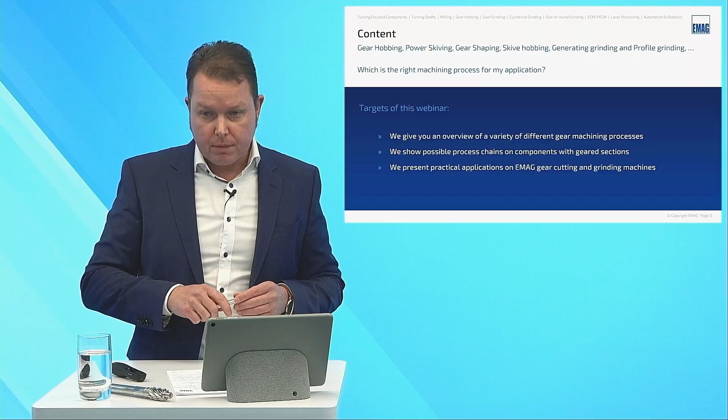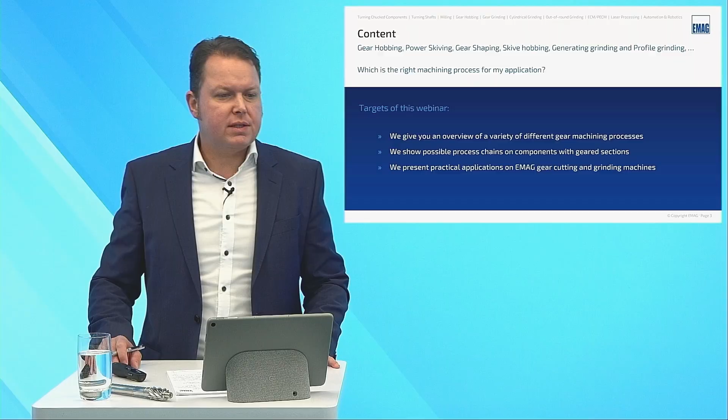The targets of our webinar are the following: we are going to give you an overview of a variety of different gear machining processes, then we are going to show you possible process chains on components with gears, and we present practical applications on EMAG machines that we have already realized in the past for our customers.

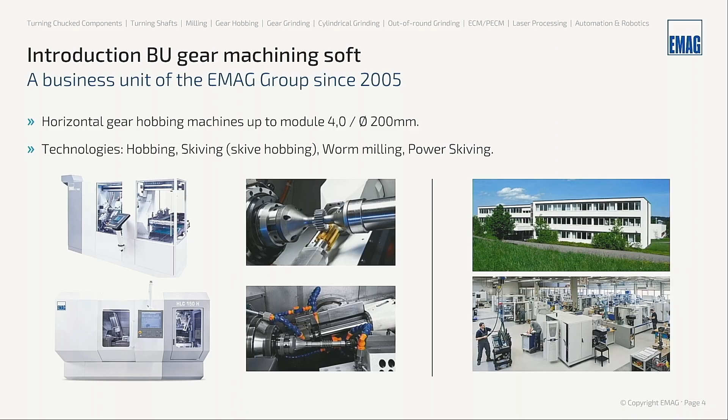The business unit I come from is placed in Villingen-Schwenningen, Black Forest area. Here the focus is on horizontal gear hobbing machines up to module 4, diameter 200 millimeters. The technologies are hobbing, skiving, that means skive hobbing, worm milling, and also power skiving processes.

And Alex, I kindly invite you to introduce your business unit as well. Our business unit EMAG SU is located in Anzola, in Italy, close to Bologna. Our products are vertical and horizontal hobbing machines, vertical and horizontal profile cutting machines, shaping machines, shaving machines for the automotive industry, horizontal profile grinding machines with different applications, and vertical generating and profile grinding machines. The maximum diameter we can produce is up to 500 millimeters.

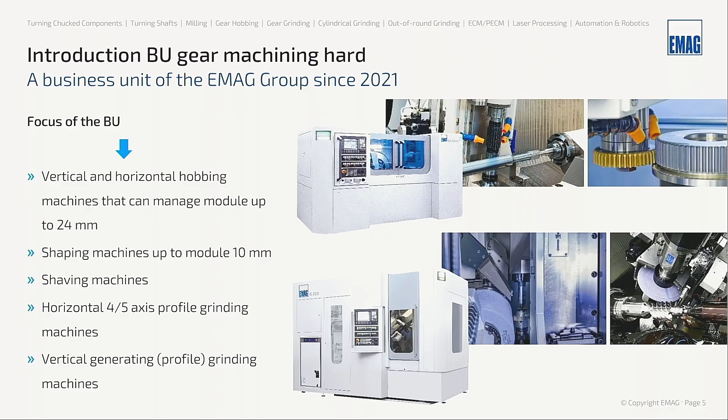Let's come to the classification of the manufacturing processes of gear production. There is a specific breakdown according to the DIN standard, the DIN 8589-6, that classifies these processes, and here is the overview.

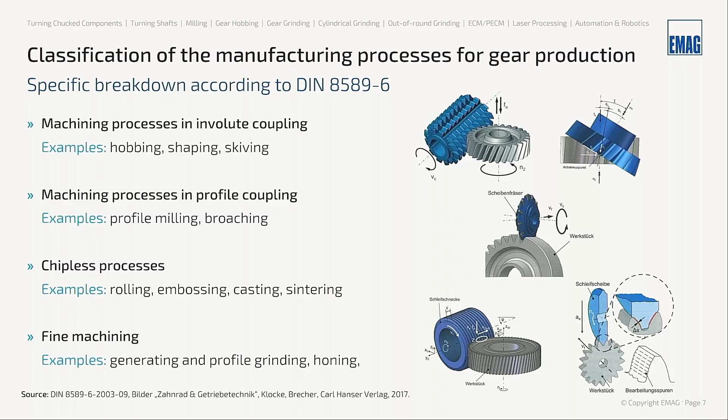We have machining processes in so-called involute coupling, which we'll talk about a little bit later in more detail - that means, for example, hobbing, shaping, and skiving. Then we have the machining processes in profile coupling, this is profile milling or single index milling, for instance, or broaching. Then we have chipless processes such as rolling, casting, or sintering. And last but not least, there are also the fine machining processes such as generating grinding, profile grinding, or gear honing.

So what is the meaning of a generating process? I'm trying to explain this to you in more detail. On the left side of this slide, we have an overview of the different processes: shaping, hobbing, and power skiving are shown. On the left side, you can also see this, let's call it a basic rack, and the basic principle of this generating method is explained on the right side of the slide.

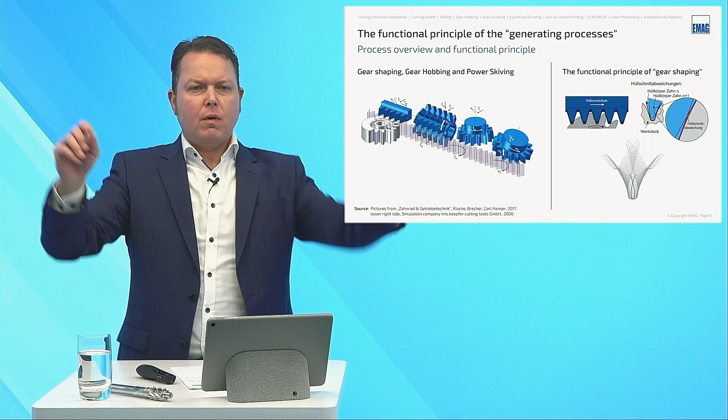Let's take a look at this basic rack. Let's assume we would conduct a cut into the plane of this slide. So we have a gear, shown in gray color, and this blue colored basic rack, and now we conduct a cut. What will happen? We will, of course, have the negative shape of this basic rack in our gear.

If we now were to rotate the gear slightly and simultaneously shift our basic rack, and then execute another cut, we would of course leave the pattern once again. By means of this generating, this coupling of the two, we make sure that these patterns overlap in a certain manner. This is how it works to realize an involute tooth shape by means of a straight basic rack profile.

Of course, this leads systematically to certain deviations. This is the so-called enveloping cut deviations, one of the systematic deviations that are known from the gear hobbing process, for instance. Here on the lower side of the slide, you can still see a realistic simulation.

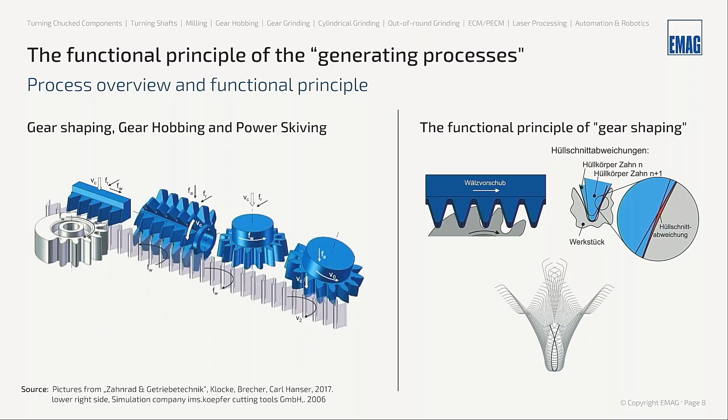Simulation of a steering pinion. It's a tooth gap from a steering pinion, and you can see how this tooth follows a trochoidal path into the tooth gap and out again. This will still be overlapped by the axial feed rate, which is actually a linear movement into the plane of the slide.

Which process is the right one to choose? First and foremost, there is, of course, the feasibility. Here on the left side of the slide, we can see a nice picture from Ruben Bauer, who has written his dissertation at the IWU Fraunhofer in Chemnitz. He has made a very nice example. You can see in gray color this workpiece. It is a kind of spline, and it has an adjacent shoulder.

Here we see the three different potential gear machining processes: gear hobbing, gear shaping, and power skiving. There is one significant difference. In gear hobbing, we have a hob and a gear, and they interact with a crossed axes angle of roughly 90 degrees. As you can see here, we would have interference with the adjacent shoulder if we were to hob this workpiece. So this will not work, but there is an alternative process available.

This is gear shaping or also power skiving. With gear shaping, we have the shortest over-travel of the tool. We just need some tenths of a millimeter in order to make the tool exit, to get out of the gear we are machining. This is enough, so we can machine this part with the adjacent shoulder, due to the fact that the axis of tool and workpiece are actually aligned to each other.

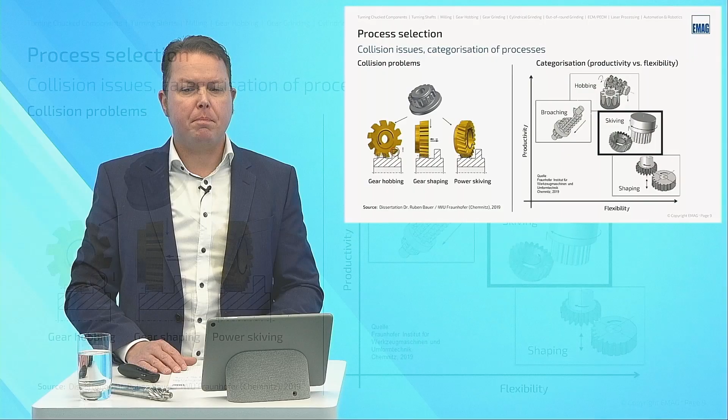They are parallel. Then there is power skiving. This is somewhat in between with regards to the over-travel of the tool, because here the workpiece symmetry axis is inclined at an angle of approximately 20 degrees. This is necessary in order to make the process work, and this is actually where the cutting speed comes from. This is the basic kinematics of power skiving, and here also a certain over-travel is required, but way less compared to the gear hobbing process.

On the right side, we still have from the dissertation of Dr. Ruben Bauer a categorization chart. We have productivity and flexibility on the two axes of this diagram. On the left side we see the broaching process. Broaching is considered not very flexible, simply because every broaching needle is dedicated to each individual internal gear that is going to be broached. So there is not much flexibility, but it is considerably productive since only one stroke is required to finalize the internal spline.

Then we have hobbing. This is very productive and flexible at the same time. I 100% agree with that, because hobbing gives us the flexibility to use one basic rack - one hob profile - to hob any number of teeth, as long as there is no profile modification required in the hob. That makes this process extremely flexible or versatile, and also productive, since it is a continuous machining process.

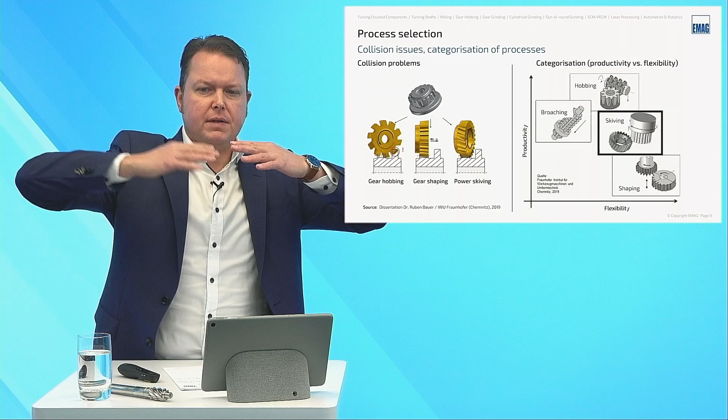And last but not least, there is also the shaping process in this chart. It's considered to be flexible but less productive. Why? Simply because of its kinematics - the shaping process is of a non-continuous character, meaning we have linear strokes that conduct the cutting movement. Due to the reason that it is simply not continuous, it is less productive.

Which are the accuracy classes on the gears that one can achieve with those processes, and which is the surface finish as far as the roughness values RZ are concerned?

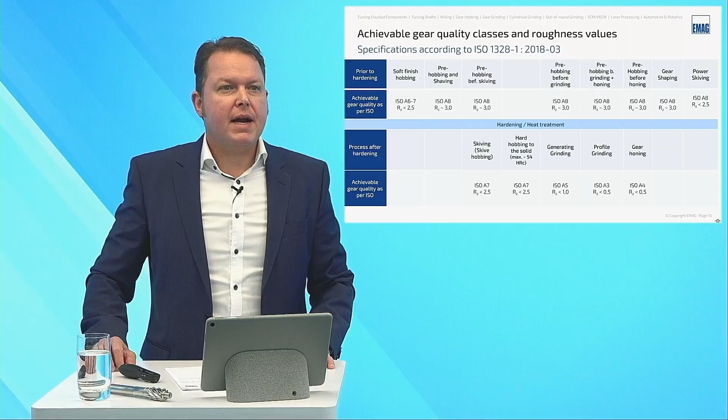Here we have prepared a nice overview for you. It shows you the different processes in the first line. Underneath, in the second line, we can see the corresponding accuracy classes according to the ISO standard 1328-1. Then in the middle of the slide we have the hardening process, and then we come down to the hard finishing processes. Let's make one example here.

The second column from the left is soft finish hobbing. We can achieve an accuracy class, well, with a good tool, maybe 3A or even 4A accuracy. With a good blank and a good machine, of course, and work holding fixture, we can achieve maybe class 6 to 7, and a surface finish on the flank of RZ 2.5, corresponding to an RA value of approximately 0.5 micrometer. Then comes heat treatment.

And Alex, what would you say, what is achievable when it comes to the hard fine machining processes? With generating grinding, you come down to class 5, and with profile grinding, it's a little bit better, up to class 3.

This, of course, has always to do, as you mentioned before, with the tools which we are using, and also with how good the incoming quality is, the quality of the clamping fixture. So this has also an influence on the achievable quality you get out at the end. The better these clamping fixtures and the incoming quality are, the better the final quality is at the end. And also with the surfaces, it depends which kind of tools you are using, which kind of roughness you can achieve at the end.

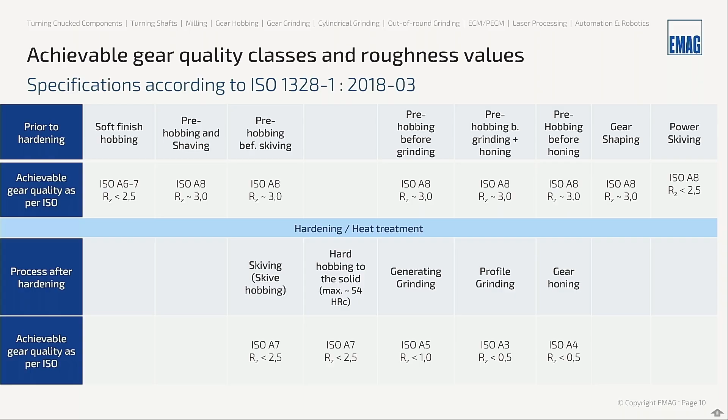Alex, one question. Besides the conventional method of generating grinding, I think there is also polish grinding. Would you consider polish grinding to be the new industrial standard for the OEM and Tier 1 business? What would you say? No, I don't think this is the standard.

The reason is when you are using polish grinding, you must do a rough and a finishing pass, then jump to a different area of the grinding wheel and do the polishing pass, and this takes more time. So the costs are also higher. I think in some applications it makes sense to do this, but in other applications it makes no sense. So there is maybe some balance between these two kinds of processes.

Maybe an alternative to this is fine grinding, where we do a roughing and a finishing pass on two different grain sizes of the grinding wheel itself. So I think this is something in between. Right, okay, understood, thank you.

So let's come back to the topic of the process chains. This chart shows that there are many different viable ways to machine a gear. On the left side, we see the blank. This can be a forged part, it can be a slug, it can be maybe turned from the bar, whatsoever. And the question is, how can we come to the final status of the gear?

I would say when it comes to the determination of the process chain, the properties of the final product determine how the process chain should look like. Here are some viable ways. Let's start from the right side of the chart.

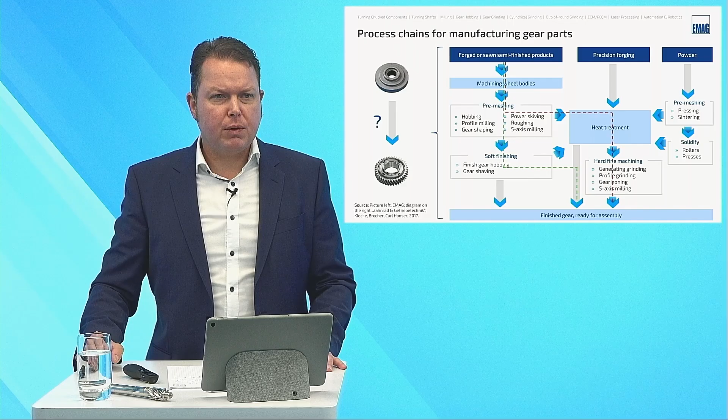We see powder metallurgical processes, for example sintering. This process is a very good solution when it comes to extremely complex geometries on gears. In case you have a gear with blind holes, slots, or cams, if it's really a complex geometry, then powder metallurgical processes can really make sense. There is, of course, the disadvantage that still today powder metallurgical gears usually are not yet on the same level as conventionally produced gears as far as their mechanical properties, such as tensile strength, are concerned.

An alternative to this is the precision forging process. I always think about the straight bevel gears, for example, in a differential gearbox from a passenger car. These gears, for example, are usually precision forged so that there is actually no chip-removing process as far as tooth machining is concerned.

And then comes, of course, here in red and green color, the two typical paths that we know from gear machining. So first of all, we start, for example, from a slug. Then we have machining of the wheel body. We talk about rotating workpieces usually, so turning is usually the preferred method.

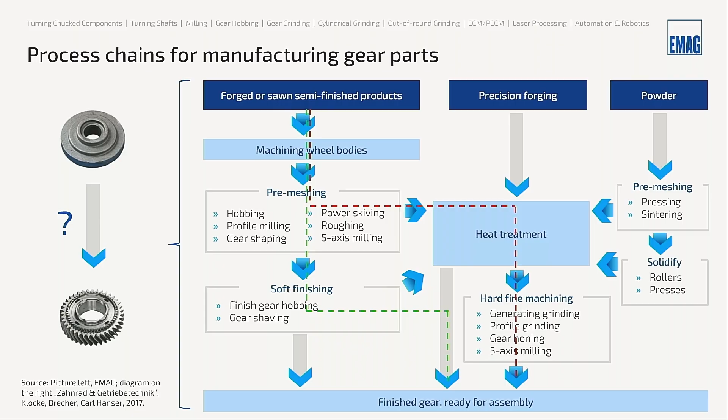This could be made, for example, on an EMAG VL3 Duo, Op10, Op20 turning. Then comes green machining of the gear, which could be hobbing. Now we follow along the green path - it could be finish gear hobbing. Again, if we use an appropriate hob in good accuracy, good blank, good work holding fixture, good machine, and apply a two-cut strategy, we may achieve a DIN quality class 7, and the workpiece will either still be hardened or be ready immediately for assembly. The red path foresees heat treatment in between, and afterwards hard fine machining, such as generating, grinding, and then we end up with a way higher accuracy in gear geometry and surface roughness.

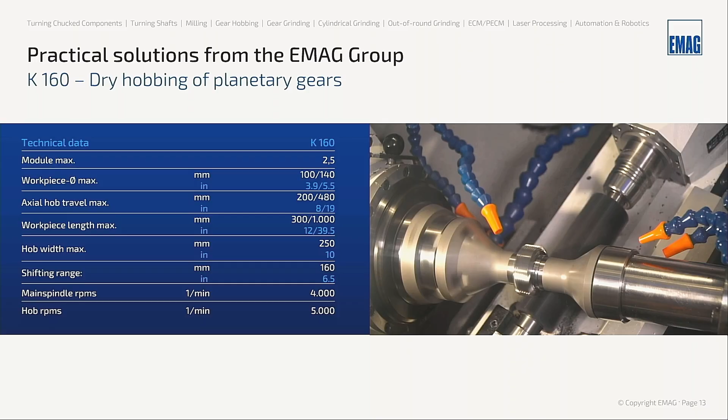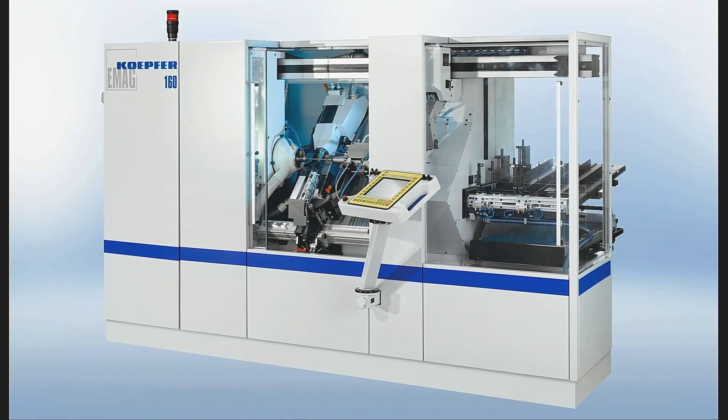How can such a process look like when it comes to pre-hobbing, rough hobbing, before gear grinding? Here we see an application on a Koepfer 160 gear hobbing machine, horizontal style. On the right side we have the automation cell, and on the left side there's the work area.

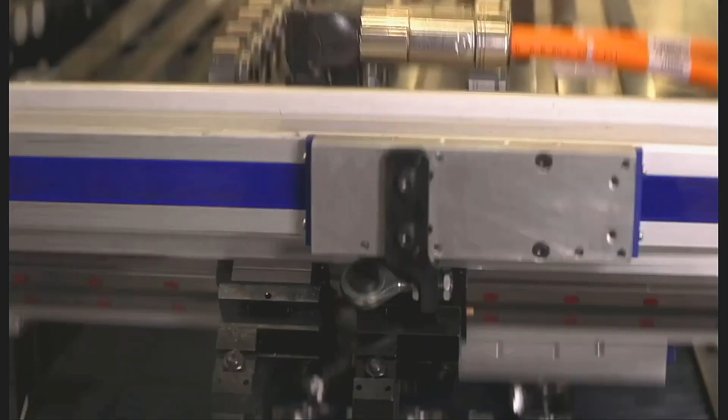Here now the movie shows the so-called servo distributor. This consists of two additional auxiliary axes and CNC-controlled axes that take care of the workpiece handling. These blanks roll down by gravity on such a chute magazine, and once the workpieces have been finished, they will be deposited underneath on the conveyor belt.

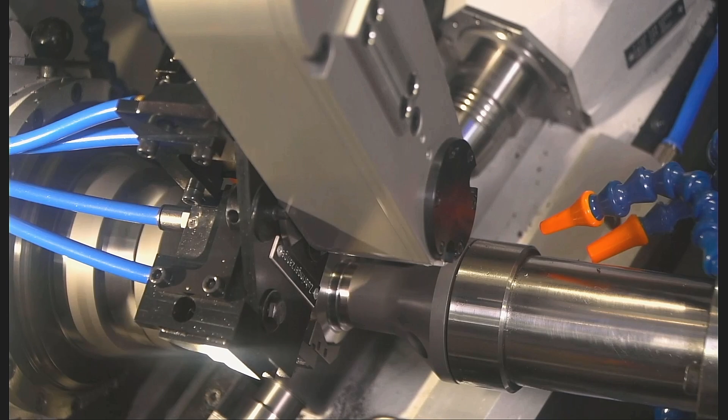Now we see the process. This is a tungsten carbide hob, shank type execution, diameter 50 millimeter, 17 gashes, 2 starts, dry hobbing, Alcrona coated, single cut strategy. On the left side you see the deburring disc coming from the lower side in order to remove the burr on the face side of the gear. And here again, the finished workpieces deposited.

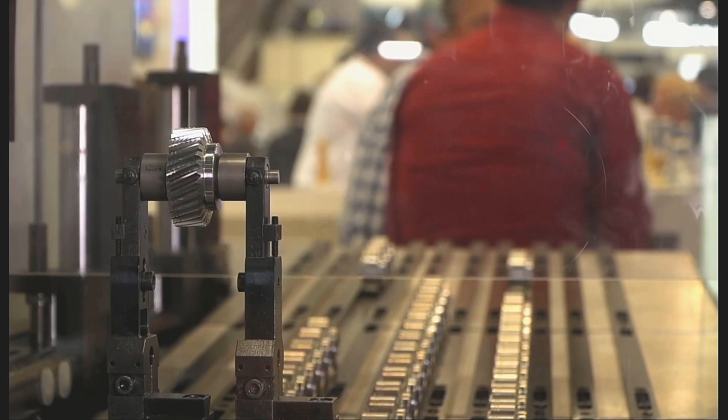This is now pre-hobbing before grinding. Gear accuracy class 9 is sufficient in this case, and the cycle time here is less than 10 seconds. So it's quite quick.

Then there are, of course, also larger, bigger machines within the EMAG Group and also from other business areas such as industrial or agriculture business. I think, Alex, you have a lot to tell about these applications, right? So we have bigger horizontal machines. All these machines have direct-driven table and direct-driven hob head, available in different axial travel - 1.5 meter, 2 meter, or 3 meter - for the CLC 260 H. On this machine you can cut long shafts, worm gears, normal gears, of course. So these are also good machines for job shop companies who have a big variation in their parts. But also in the truck industry or in the defense industry, there are a lot of long shafts where the two gears at the end must be aligned to each other.

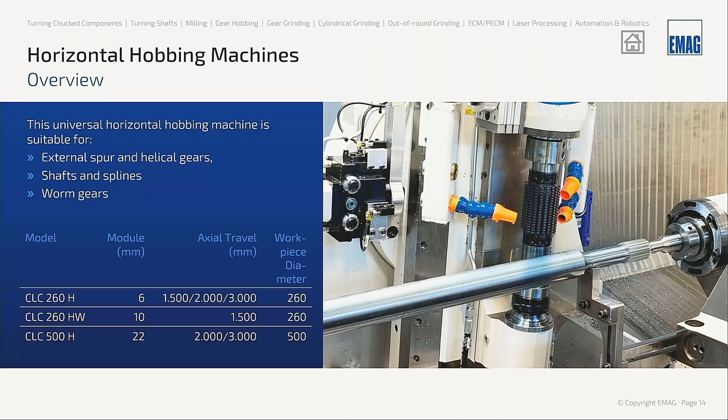This is the perfect machine for this because you can cut on both sides in one clamping, and have a retractable inductive sensor which can be swiveled out to find the right position relative to each gear. Why does it work on these machines? In the right picture, you can see an automatic steady rest. This is a 3-point steady rest, which can be moved automatically on the OD of the part and can be positioned in the machine wherever a gear is located.

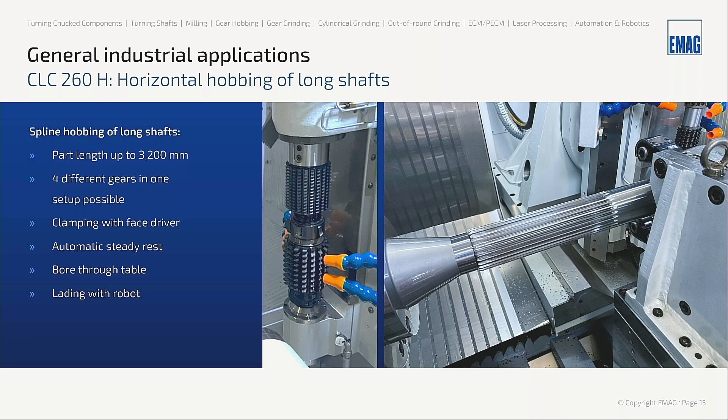So here the setup time is very small. This part will be clamped between a face driver and the center on the tailstock side. Then with the steady rest in the right position, you can cut all the gears along this part. There is a possibility to have 4 different gears on a shaft, which can be produced in one setup. Also on the left picture, you can see the assembly of a tool arbor.

Here we have 3 different hobs on the machine. This is a module 4 and module 2 hob, and in between there is a chamfer cut unit where we can produce a chamfer on the module 4 part only from one side. It depends here on the part we use.

So here the maximum length between centers is 3.2 meters on this machine, but there is also a table through-bore with 80 millimeter where you can put longer parts through this table bore and then cut the part on one side, move it out, turn it around, and put it again. Also, these machines are available with a milling cutter head for cutting worms, for example. Loading normally is here with a robot, and we also have a nice chain storage where different lengths and sizes of workpieces can be stored during the process.

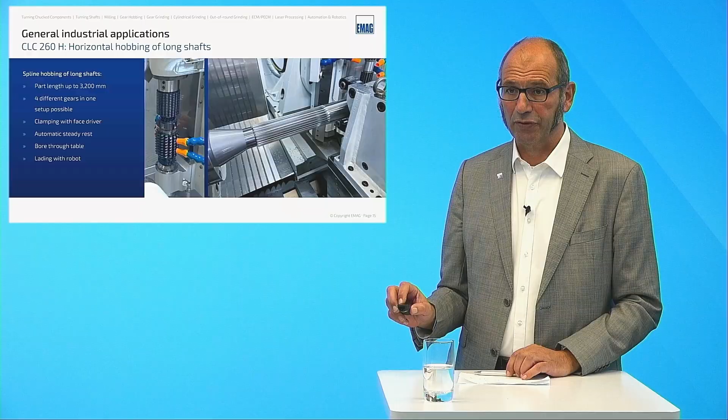So I would still come back to the topic of the process chain. Here is, for example, one well-known workpiece. It's a steering pinion from a passenger car. And there's one typical process chain.

It consists of turning op 10/20, which could be done, for instance, on a VL2 or two VL2s interlinked to each other. Then comes the hobbing process, where we achieve quality class 8 as per ISO 1328. Then comes the hardening process.

During the hardening process, distortions will appear. That means we will lose one or two classes depending on how we harden the workpiece. There are, of course, also different behaviors depending on the different hardening methods available. Steering pinions usually are either case hardened or induction hardened.

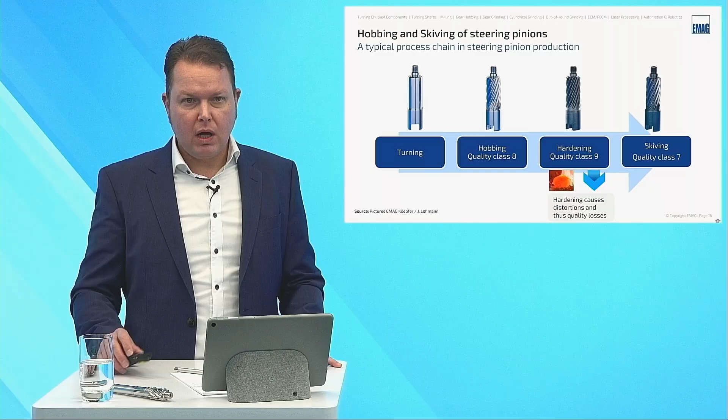Then we have a loss of one or two classes, and now we have the possibility to recover. That means we can use exactly the same gear hobbing machine once again and do skive hobbing, or simply skiving, with the same machine by means of a tungsten carbide hob, and then we come back to accuracy class 7. Here are the inspection charts of such a workpiece.

On the left side, we see the quality class 8. And here in the middle of the chart, we see what happens after hardening. You can see there is a strong distortion with regards to the lead direction of the part, even more than 30 microns.

And on the right side, you see what happens after the skiving process. So we can come back and recover, achieving an accuracy class DIN 7 on the hardened workpiece.

Well, there's still to add: if we know that we have a distortion of 30 microns in the lead, we would, of course, already pre-compensate this in the green hobbing stage, so that we make sure we have a nice uniform and constant stock allowance along the whole lead of the workpiece.

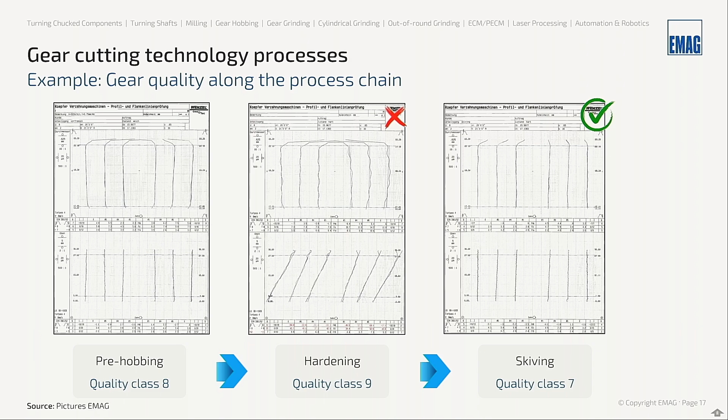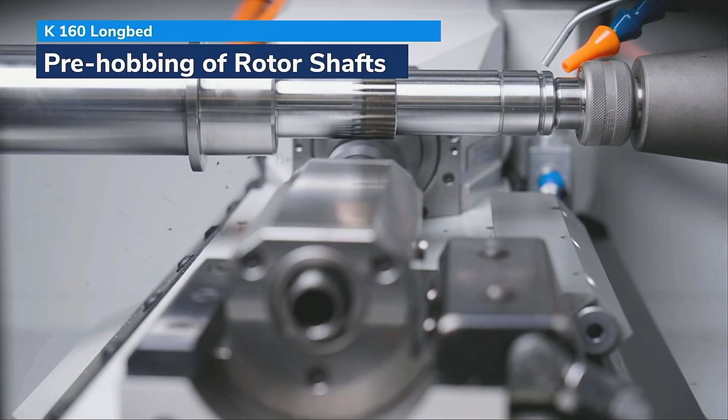Another workpiece that can be pre-hobbed and skived on our machines is a rotor shaft from an E-drive. We see here a movie from such a workpiece. There are different kinds of rotor shafts. We will soon offer also a webinar for machining of rotor shafts.

Here we have the K160 in long bed execution. Long bed simply means the machine has been stretched in axial direction, so we have a longer axial hob stroke. It's now 480 millimeters with this machine, and we can machine parts up to 600 millimeters in length.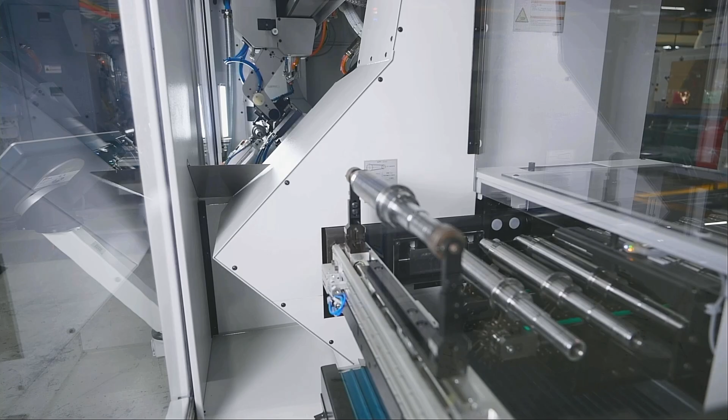And here you see it's a roughing process. You can see we have considerable feed scallop marks on the gear, but this is also permitted because it's just pre-hobbing. And now here the distributor deposits the workpieces underneath the chain magazine on this conveyor belt.

So this was pre-hobbing. Now let's switch over to the skiving process. It's the same machine type with a different automation. Here, the customer wanted us to prepare the machine with two chain conveyors, one coming from the front and one depositing the workpieces to the rear of the machine.

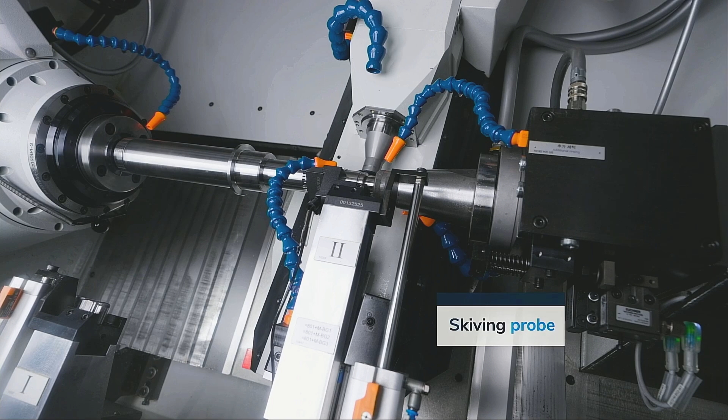Now we load the workpiece that already has existing teeth, of course. And now comes the auxiliary tool with the skiving probe and a free-blow nozzle. We detect the already existing teeth, and by means of a reference signal, we can calculate and evaluate the C-axis offset required to make sure we find the tooth gap of the existing gear.

Skiving can be made either wet or dry. There are advantages and disadvantages. Sometimes dry machining allows us to avoid or skip any washing operation. On the other hand, sometimes we have to reduce cutting speeds in order to avoid surfaces from burning.

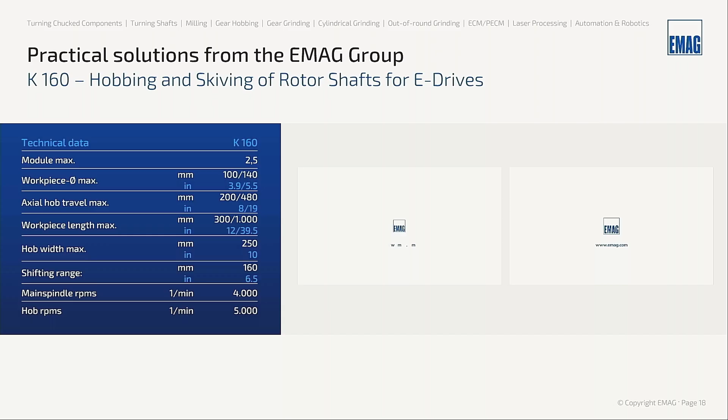Right, now let's come to another EMAG product. It is the HLC 150H, and this is our most versatile gear hobbing machine. It is not only a gear hobbing machine, it's actually also a worm milling and a power skiving machine. We can do hobbing applications, skiving applications, worm milling, worm skiving—that means single index milling by means of disc cutters—and we can also do hobbing of worms and moreover even power skiving of external gears.

This is now external gears. In case we wanted to machine internal gears, we still have other products within the EMAG Group, like the VSC 400 PS power skiving machine. But here now this is external gears and shafts.

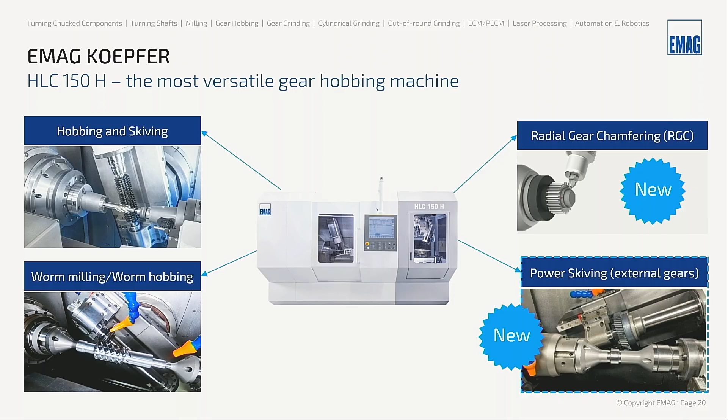How is it possible to realize all this in one machine? This comes from a very innovative concept that I'm going to introduce to you now. Here on the right side, on the top, we still see a little outlook into the future. We are right now developing the radial gear chamfering method for this machine as well, so that we can chamfer gears whenever it is required. So what is now the secret of this new concept?

On the left side, you see the conventional machine kinematics of a horizontal gear hobbing machine. We have a direct-driven water-cooled hob head that drives the tool, and right underneath we have the Y-axis, the shifting axis, which consists of a ball screw spindle and guideways. This axis makes sure that independent of the hob head inclination, we will have the right direction for shifting of the hob. After those axes comes the pivot point, the A-axis, that swivels everything.

On the right side, we have our new concept - an innovative design. We still have a direct-driven water-cooled hob head, but instead of having the Y-axis, the shifting axis, immediately underneath, the whole hob head is suspended from its pivot point. That means immediately comes the A-axis, so we can swivel the hob head. By means of a so-called physical Y-axis, shown here in orange, we can move the whole pivot point, or plunging cylinder, up and down. This gives us a completely new degree of liberty.

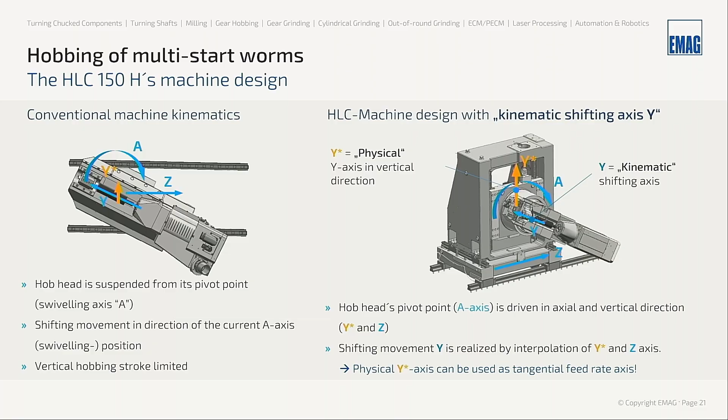This allows us to unify two important things: a long shifting range of 220 millimeters, and at the same time we can swivel the hob head 180 degrees. So we can machine any helical gear whatsoever.

We make benefit of this when it comes to machining worms and worm gears. Here we see three different applications: a worm that we will single index mill by means of disc cutters, then the tangential hobbing method for multi-start worms, and where the worm is, the worm gear will not be far - of course, also various hobbing methods for worm gears.

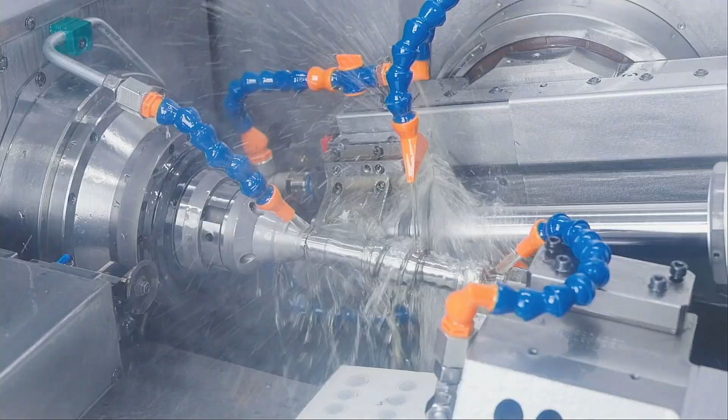Let's start with the worm milling process. This is the HLC 150H horizontal machine, pretty similar design as shown already with the K160. We have a chute magazine, the worms roll down by gravity, a distributor prepares the workpieces for the gantry loader - in this case a gantry loader with linear gripper for workpieces up to 10 kilograms and 150 millimeters diameter. Now you can see that we apply a special strategy.

This is a 3-start worm. The first start is cut by conventional cutting, then we switch for the second cut to climb cutting, and the third start will be cut again by conventional cutting. Why do we do this? Very simple - we can save time because in this manner we can avoid empty backstrokes. This is another plus when it comes to productivity.

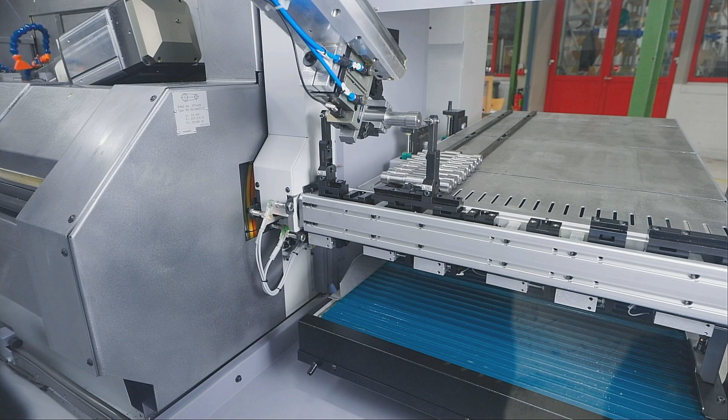Can we also deburr these kinds of worms on the machine? Good question, Alex. Yes, we can. We even have developed a conversational software program for our HMI, so if we want, we can deburr the sharp edges for each start by means of the milling cutter - once we have cut them, we go back to the initial position and remove the sharp edges.

What is the maximum module you can cut on this machine for worms? For worms, it's module 4.5. With 4.5, we still find that considerably okay. But when it comes to hobbing, it's maximum module 3.5 approximately. We also have, in EMAG, bigger machines for milling worms up to module 12 with much more. So we have two different possibilities.

We have a CLC 260 HFR, which has a worm milling head on this machine. We also have a vertical machine, also with the same worm milling head, but then a 4-station ring loader, and we are able to cut also the keyways in the 90-degree position. So we have high productive machines for worms, also for bigger ones, that we can do this really in a short time with the additional process on top.

Does that mean that you can mill the keyway even in the idle time? Yes, that's 100% in the idle time. So this is a fantastic machine because you have both processes and can be sure that you have also key milling in this. And also we can measure the keyway, the size of the keyway, in the machine.

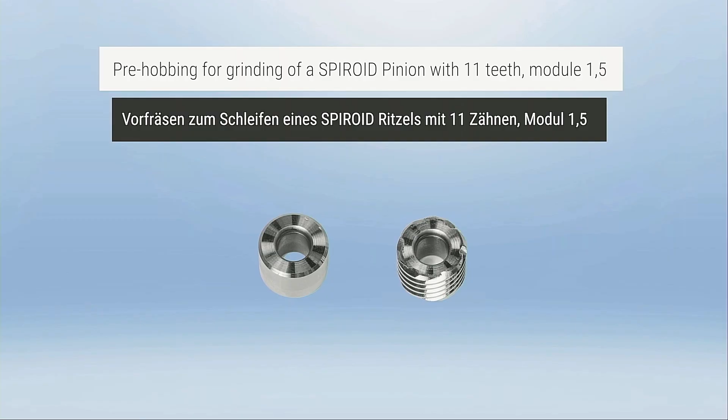Here now let's come to the second application that we show: the tangential hobbing of multi-start worms. Here we have a relatively new patent that was applied for last year, and this allows us to machine multi-start worms by means of a hobbing process. So it's not single index milling, it is hobbing.

And we do this by using our axis arrangement of the HLC 150H. That means in this case, we move the hob head simply straight upwards. We move the hob along the circumference of this worm using a multi-start hob, and this has a very big technological advantage.

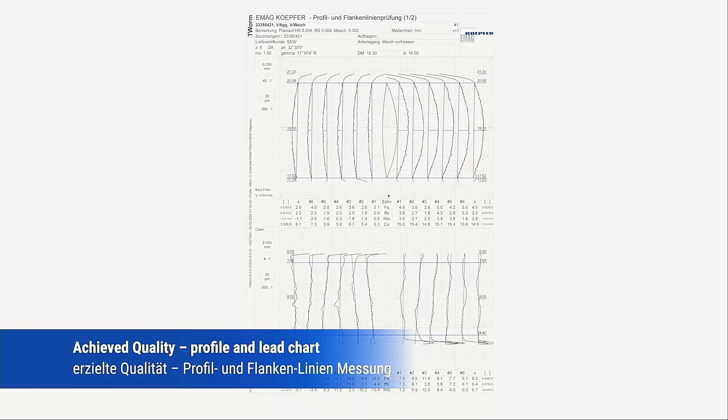The advantage is that in gear hobbing we usually have two kinds of systematic deviations: feed scallop marks and profile deviations. By using this method, we make sure the deviations are washed away by themselves—they overlap and overroll, so the workpiece cleans itself up from these systematic deviations. In other words, we can use even a 3-start hob for a worm with 3 starts without any lack of pitch or other deviations. This is a very innovative process that we have patented, and in this particular case it cuts the cycle time in half compared to what this customer did before.

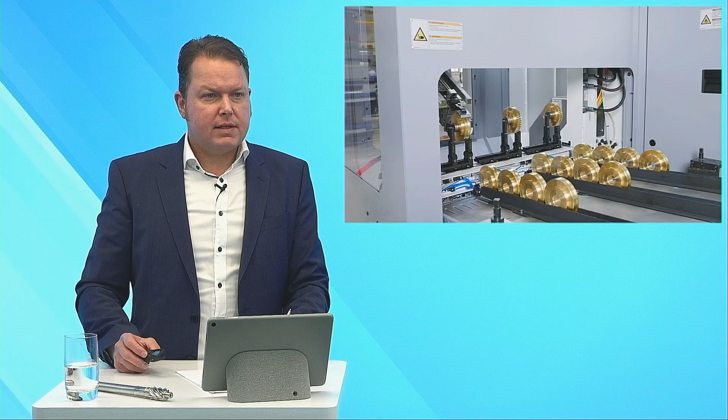Where the worm is, the worm gear is not far. Let's take a look at our worm gear machining capabilities. Here we have the machine set up for bronze worm gears, still with the gantry loader and linear gripper. And now you see this titanite-coated hob.

It's a shank-type hob for hobbing this globoidal worm gear. What we do here is simply radial plunging—we plunge in with a radial feed rate that is non-continuous, meaning it is digressive. Once we've achieved final depth of the tooth, we allow 2 RPMs for dwelling in order to make sure we have full depth on all 360 degrees of the gear. This is possible as long as the helix angle is smaller than approximately 11 degrees.

With steeper helix angles, like in this case, we have to apply a different method: tangential hobbing. Here we have a hob with a taper, and there is one disadvantage—it is, of course, slower, and you cannot shift this hob. But we have to apply it because if we were to plunge this workpiece, we would cut off material that we would still need later in order to achieve a good contact pattern.

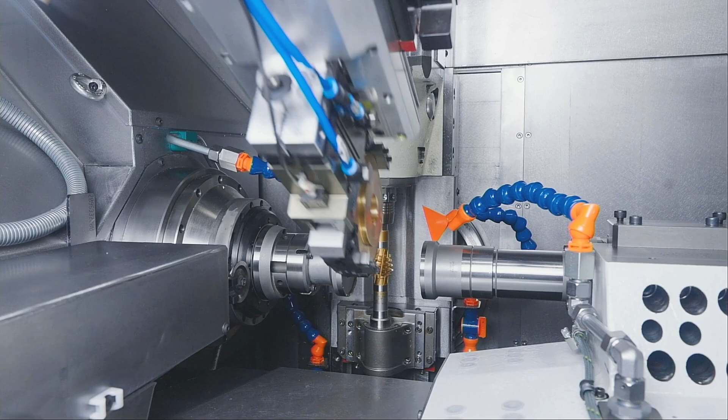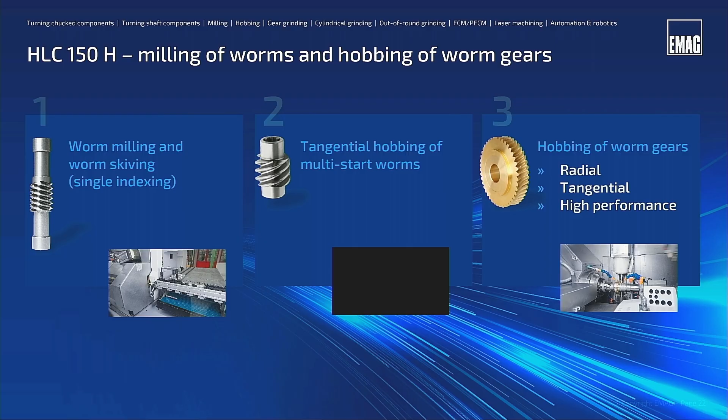Here is now an alternative to this process—you see a cylindrical hob. We can shift this hob, and we call it the high-performance hobbing method. This hob allows us to plunge in even with high helix angles, because we realize the tooth thickness by means of the machine kinematics. In other words, once we've achieved full depth, we make a shifting stroke along the y-axis to finalize one flank, then go back and finalize the other flank. So the tooth thickness is not created by the thickness of the tooth of the hob, but comes from the kinematics—it's completely controlled, and this allows us to combine the advantages of plunge hobbing with workpieces with high helix angles.

Also from EMAG Koepfer side, we have, of course, bigger machines up to 500 millimeter, with the same software option as here on the HLC 150. So we can machine these kinds of worm gears up to 500 millimeter.

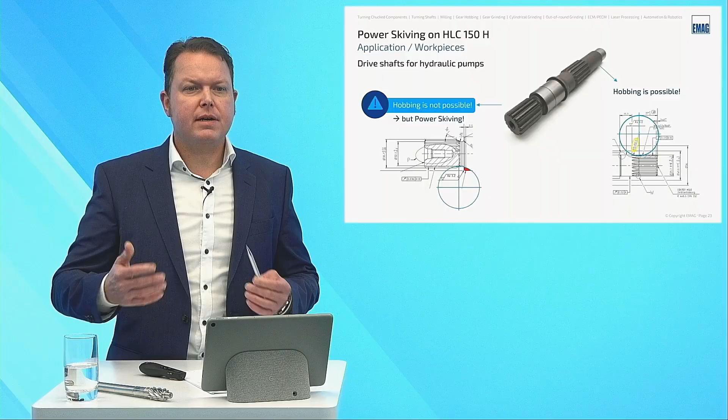Power skiving on the HLC 150—what is a potential application for this? Here we see a drive shaft for a hydraulic pump, and these workpieces usually have at least 2, if not 3 gears. You can see on the left side there is a spline, according to DIN 5480, that cannot be hobbed because of the interference problem I explained initially. On the right side, you can see the designer of this workpiece has already taken into account the fact that there is a certain sweep-out required for the hob, so this can be hobbed.

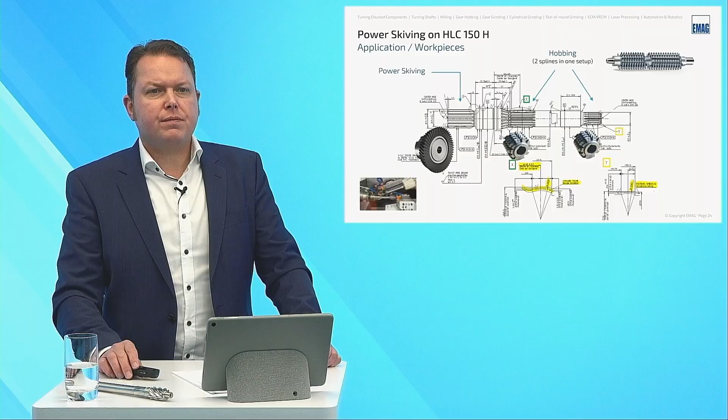There is still another workpiece from this family. Here we have 2 splines on the right side—those could be hobbed in one setup, for example by using a tandem hob as shown in the upper right corner of this slide, or this may be 2 bore-type hobs assembled into one hob arbor assembly. On the left side, we can go in a separate setup and then power skive the spline where we have the interference.

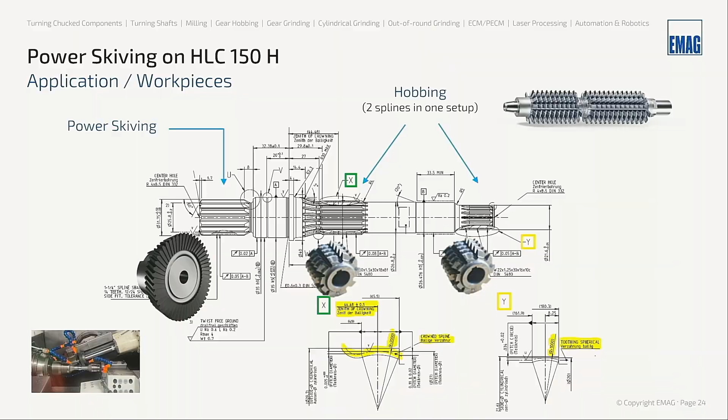How does this look on the HLC? Here is a movie—this is a planetary gear that we cut for trial purposes, and you will see the power skiving process. Please be aware we are using cylindrical tools here. That means we need an offset between tool and workpiece symmetry axis, and we realize this in order to give this tool its required kinematic clearance angle.

When I look at this process, it's not so far away from the hobbing process in speed. I think if we were to consider the net time—the contact time between tool and workpiece—it would be even more productive. But due to the fact it's a non-continuous process, we have to apply multiple cuts, and this predominantly depends on the tooth height as well. So there's a difference whether you have a full tooth or a stub tooth from a spline. I think this is actually what makes the difference.

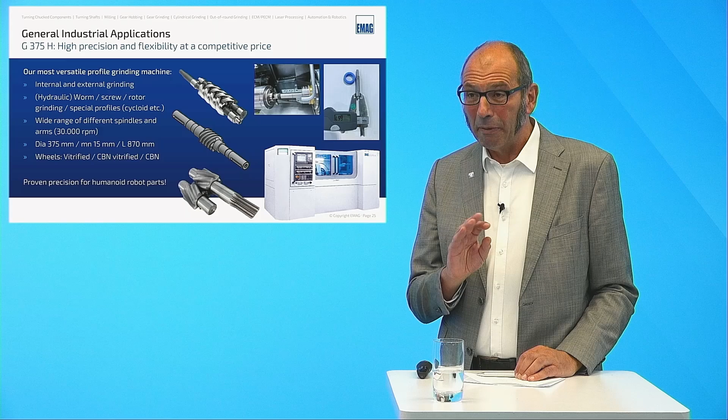Okay, here we have a small shaft with a gear with an interference. This will be ground, of course, from solid, because this is module 0.5, something like this - this will be ground from solid.

Anyhow, I see a very small grinding wheel diameter, so what is the maximum RPM you can offer on this machine for grinding? The maximum RPM is 30,000 RPM for an external spindle, so we need these high RPMs for using these small wheels.

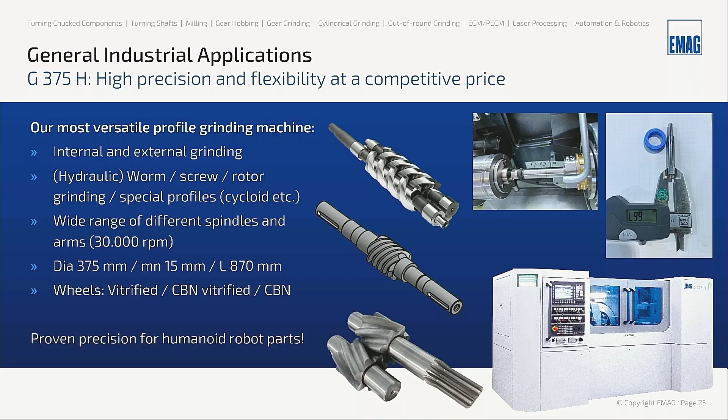And also there's an HSK cone where you can switch the grinding wheel relatively easily, because with these small wheels it's not really possible to dress a lot. And when we are making more parts, as we have done with this part, then we use dressable CBN so we don't reduce the outside diameter quickly with this wheel. Dressable CBN only resharpens the wheel and doesn't break out as many grains as the ceramic wheel does.

Right, this works also with internal grinding, as you see in the picture next to this small shaft. There we do internal grinding of a thread in this example, also with a dressable CBN wheel. We can do this with an internal ball screw, with a spline, whatever you want - we have software here on this machine, so this is absolutely flexible.

Maximum diameter is 375, and the maximum length is 870 millimeters.

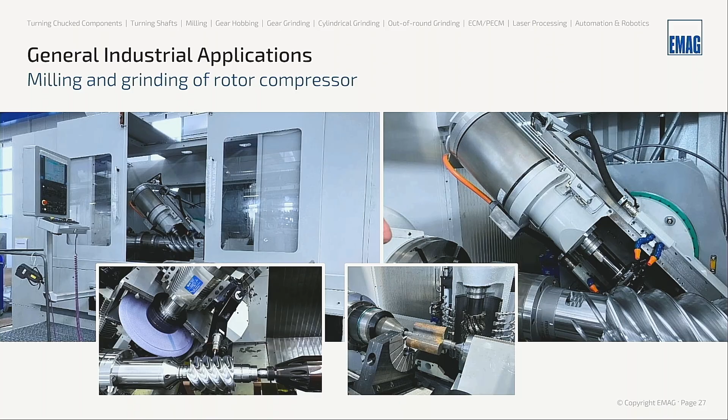Also, blowers can be cut. A blower normally has 2 or 3 teeth, as you can see in the photo below. This uses really huge hobs, length 450, diameter 350, and we cut along the flank line of this blower. So also a good application for this machine.

We have a lot of possibility to put steady rests in the right position wherever needed, and also the possibility to grind these parts on our machine. Here you can see a GW 3600 HD, a rotor grinding machine. Maximum diameter of the grinding wheel is 600 and the face width is 260. So for the blower application, you have here the right grinding wheels on this machine.

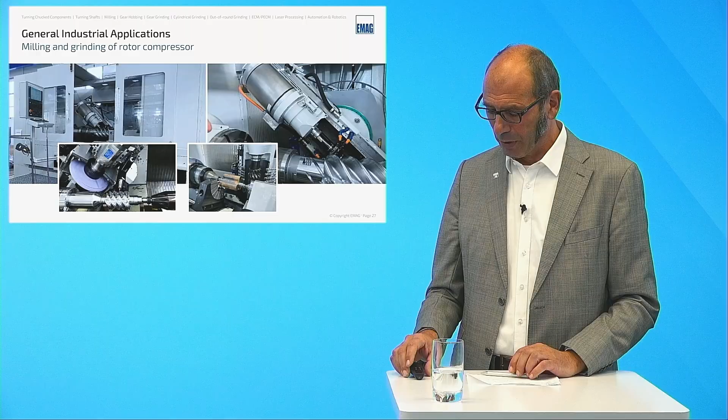These are huge grinding machines which are also able to grind very small parts, and I think this is one of the big solutions. You can grind really from small rotor up to 500 millimeter on one machine. Looks sometimes a little bit crazy, these small rotors on such a huge machine, but it's possible to do.

Let's jump back to the automotive application. This is a new development from our side, the CLC 200HC for hobbing and chamfering on this machine. We have two different hobbing heads: one for the automotive industry, up to module 3, and the other for industrial application, up to module 5. The maximum diameter we can produce on this machine is 250 millimeters.

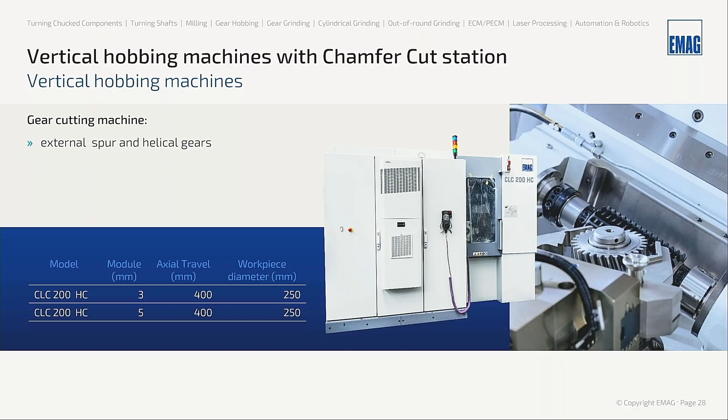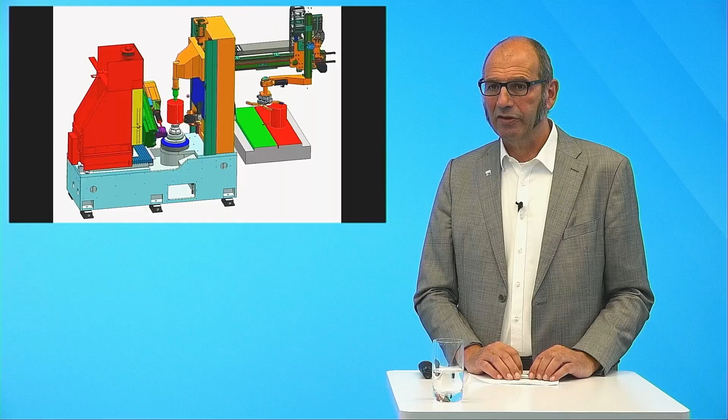How does it work? We do one cut, and in between we can do the chamfering operation. The second cut removes the small amount of material coming out of the chamfering process in the lead direction. This has a big influence on the following honing or generating process. When a honing ring has plus material at the chamfer, you end up dressing the honing ring more often, which reduces the number of parts between dressings. With the second pass, we cut all this material away and get a really nice flank line, increasing the number of parts in the following processes.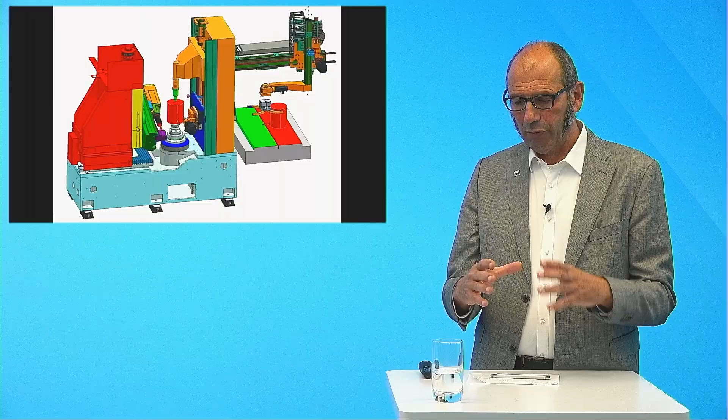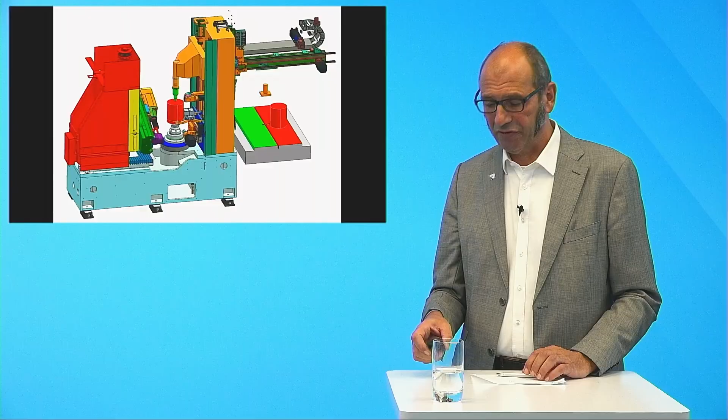Also here we have one table in the machine and a tailstock from the top, so the clamping of this part is very good because we have a tailstock, and of course these are all direct-driven motors, the table and the hob head. We have a big shift range here, so we can use very long hobs to be productive. The changeover time of the workpiece is between 4 and 5 seconds, so the automation is very fast on this machine. It can be dry and can be wet, of course.

Let's jump to another industrial application: aerospace gears. As I mentioned before, we have different grinding machines, the G 375 with maximum diameter 375 and maximum part length 870 millimeters. Then we have machines with 500 millimeter diameter up to 2.1 meters.

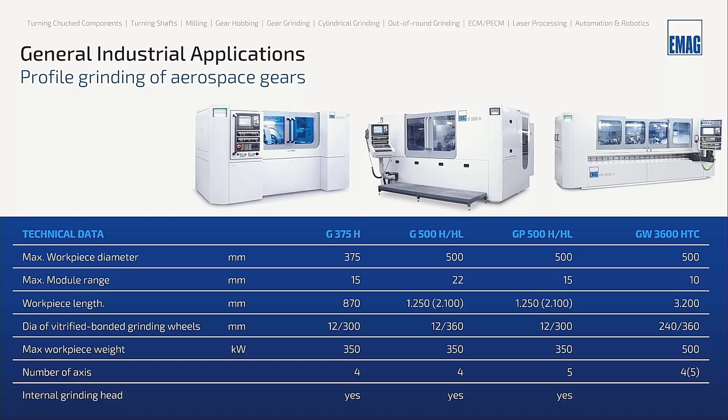And then we have the GW machines where we are able to grind parts up to a length of 3.2 meters. So these are really flexible machines. All the machines can be equipped with different grinding heads, depending on the application.

Also a very flexible machine. But what is the main point here of this double helix gear?

This is the meshing of the part. So you must find a good way to mesh both parts, that you have the same stock on both machines, on both sides of the gear. And of course, we have a cross angle of this right and left hand gear. We call this apex point. So we can mesh this part, and we do this in different positions of the workpiece.

Alex, one question. I see there is an onboard probe on this machine. What can you do with that in detail?

Yeah, we can measure the profile, and we can also measure the lead direction. And this makes it very nice, because we are checking when we are doing the meshing operation, or checking the quality at the end. We are checking this in profile and in flank direction. And then we can say, before we start grinding, we are able to grind this part in a good quality. Because here, when you have a lot of number of teeth, it takes a long time to grind this part. And when you can say at the beginning, this will be a good part, then you save a lot of time at the end.

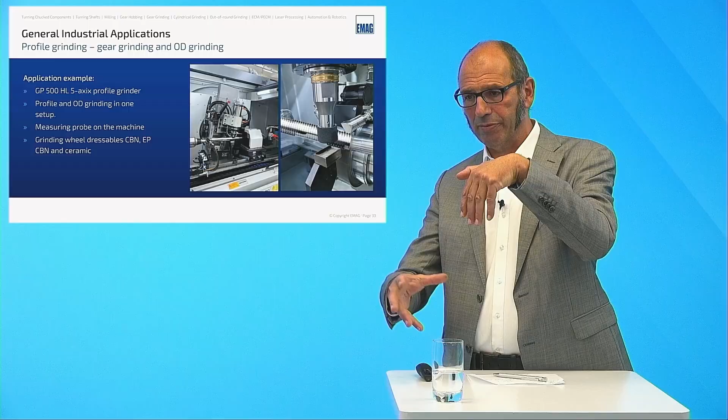Right. Here another application, it's also a 500 machine. Here we have also a tangential axis in this machine, and we have two spindles which are located in a 90-degree position to each other. One is doing profile grinding. This is the small wheel you can see in the front on the right picture, and below there is a bigger wheel for grinding the OD diameter.

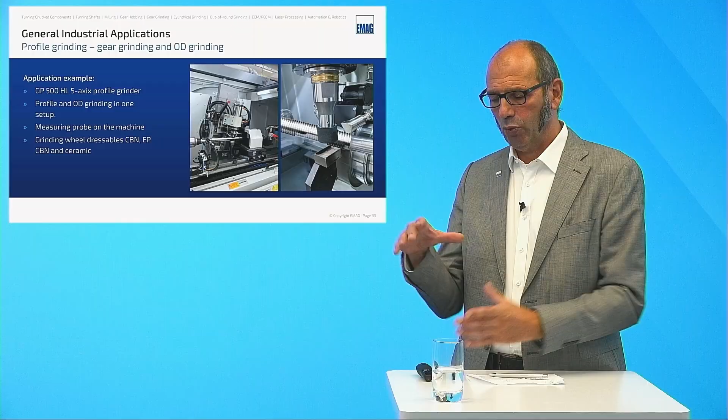Why are we using this? Here the customer, for him it's very important to have a perfect run out between the bearing seats and the gear itself. So with the OD wheel we are grinding the OD seats, and then with the profile wheel we are grinding the gear, of course.

And also these are direct drives. The small spindle here is a 5 kilowatt spindle with 40,000 RPMs, and the other one is a 19 kilowatt spindle with lower RPMs, of course.

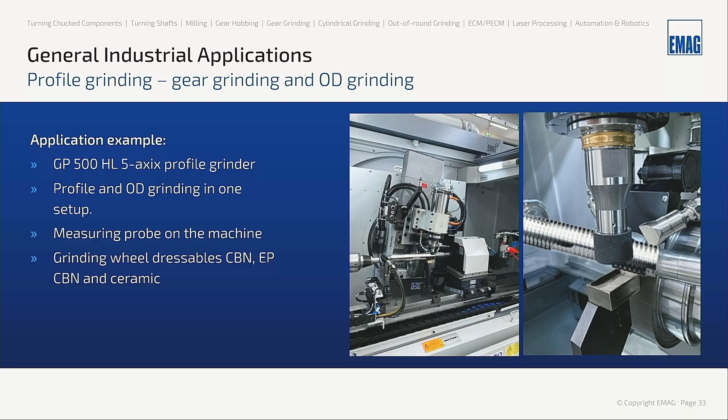So also with the probe, we can check everything in the machine. We have a dressing unit also in this machine, and also we can check here on the left picture, you can see this in the left edge. Also, we are checking the outside diameter with the Marposs measurement probe directly on the machine, so that each diameter is corresponding to each other, comparison to the quality we want to achieve here in this machine.

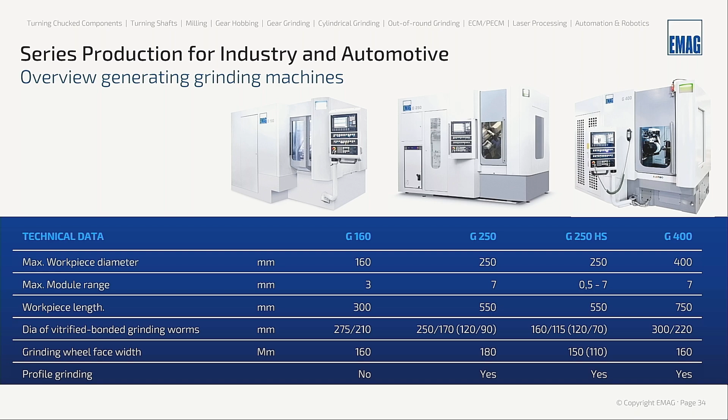So let's jump back to the automotive industry. Generating grinding, here we have three different kinds of machines, G160, G250 and G400. And from the G250 we have also a version with the high-speed head, where I'll come later to this point.

Let's look at our G160. This is a machine which can do only generating grinding, and this is a high-speed machine. As Jörg mentioned before, they have a special architecture here. So what is missing in this machine?

This is the tangential axis. Also here we are calculating, or we are interpolating between the X and the Y-axis, the tangential axis, so that this is a theoretical tangential axis.

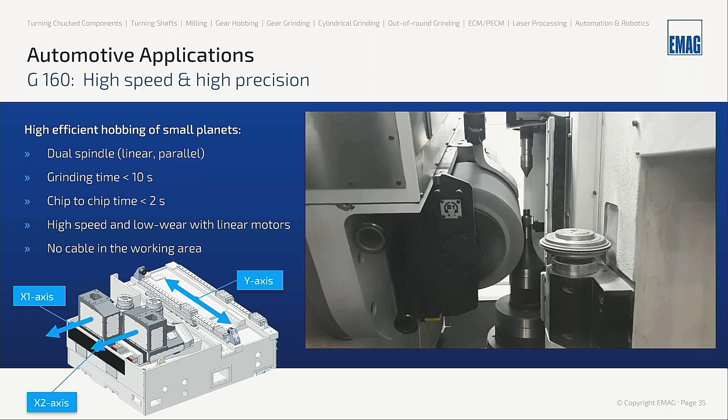And what is the advantage of this process? When you see the distance between the spindle bearing and the tip of the grinding wheel, this is 100 millimeters less than it is in a conventional head. So the vibration of this machine is less than it is in a conventional machine. So when you look at the end on the surface of the gear itself, the ghost frequencies are much lower than in a conventional machine. So the noise behavior of these gears is much better than in a normal machine.

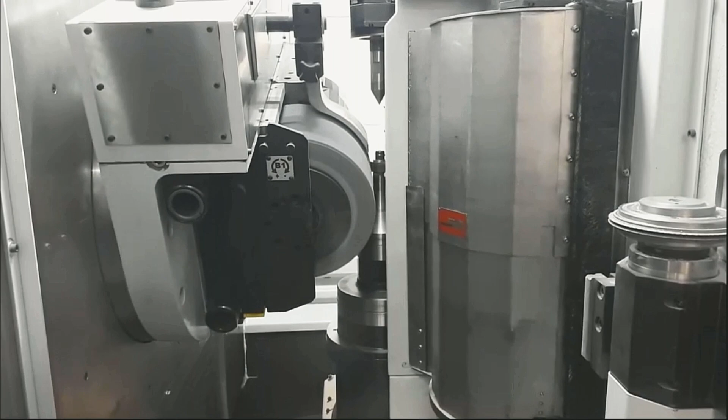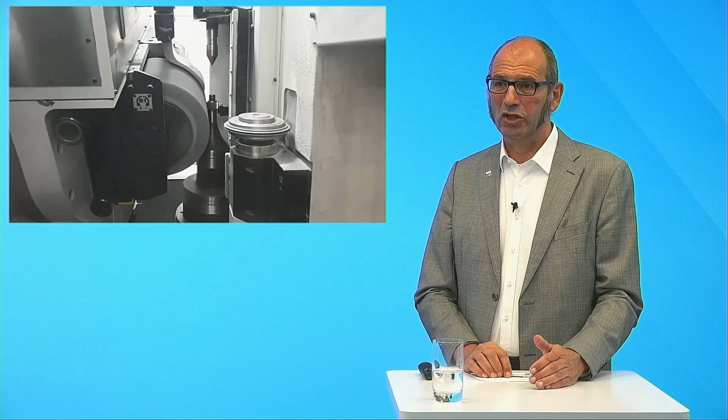What we are doing here on the machine with these small planetary pinions is a two-pass process, a roughing and a finishing process. What you can see with this special architecture is that the chip-to-chip time here is 1.6 seconds, and this is really fast. Our competitor needs maybe 2 or 3 seconds more. The grinding time of this part is below 10 seconds. Being 3 seconds faster in chip-to-chip time means this machine is generally 10 to 15% faster than our competitor's machine. This makes the machine so fast, and there is no risk of burning. This comes only from the machine architecture, so this is really a fast machine.

All the other things we have in the machine: acoustic sensor, dressing unit, balancing system, and all this stuff. What you also see in this machine is that there is definitely no cable anywhere, so it's easy to clean. This is really a highly productive machine.

Let's jump back to the bigger machine, G250HS with the high-speed head. We have seen in the parts before that the number of interferences, or parts with interference, increases, so it's necessary to have flexible machines which can do both generating grinding and profile grinding.

This is the same as in the hobbing process when we can use generating grinding, which is the fastest process compared to profile grinding. So when it's possible to do generating grinding, it's a good idea to do this. You can see this in the picture in the middle: there is a part with an interference, so we are using a very small grinding wheel to do generating grinding on this part.

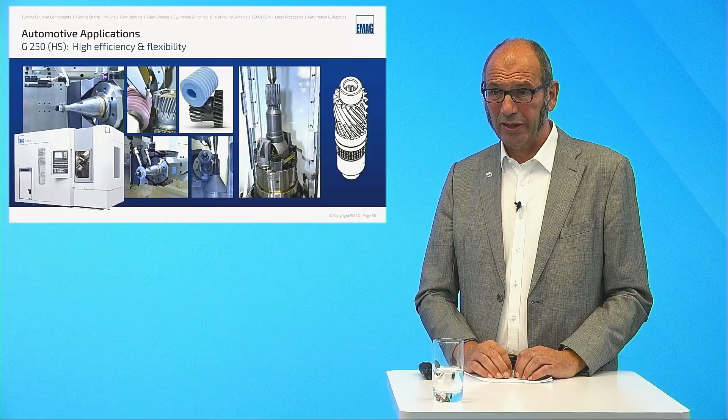But sometimes we have customers who are also interested in a highly productive profile grinding application with the two-table concept, which we have here on the machine. These are, for example, customers producing gear motors, where they have a gear pinion directly in the motor. These parts normally also have interference, and for this you need very, very small grinding wheels, 20 millimeters, something like this. You can see this in the left picture: there's a really small grinding wheel mounted on this tool arbor, also with the HSK, so that you're able to do both profile grinding and generating grinding on one machine.